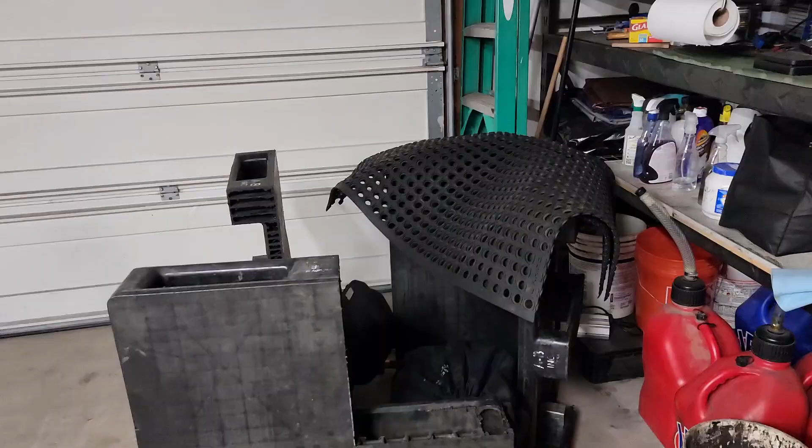I've got a project that I want to work on today. Let me show you what's going on. So you may notice here that all of the floor panels in the cargo area of Rusty are out. And I picked up some components from Wilwood, or however you want to say it.

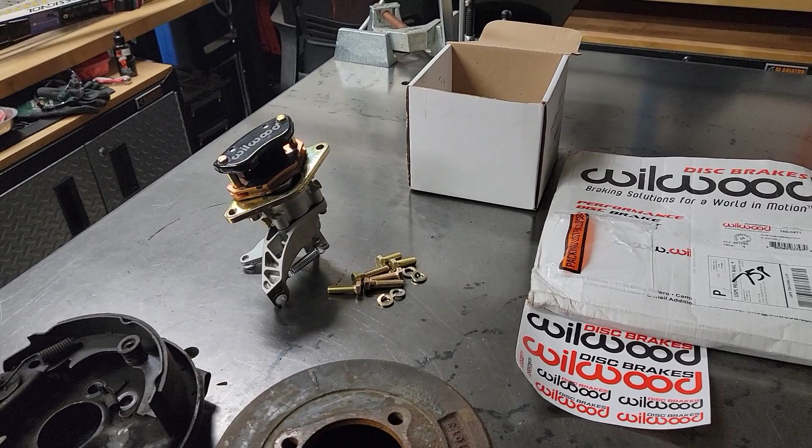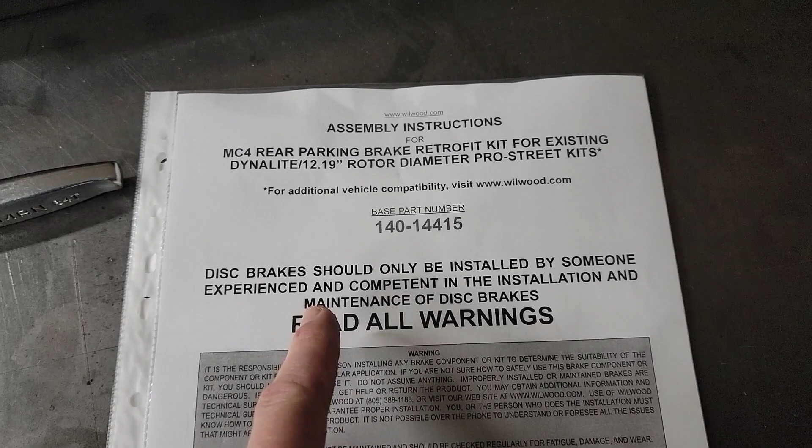First, I want to give you a disclaimer here that these should only be installed by someone experienced and competent. I'm neither one of those, so if that frightens you, this probably isn't the best video for you. Anyhow, let me show you what I came across here.

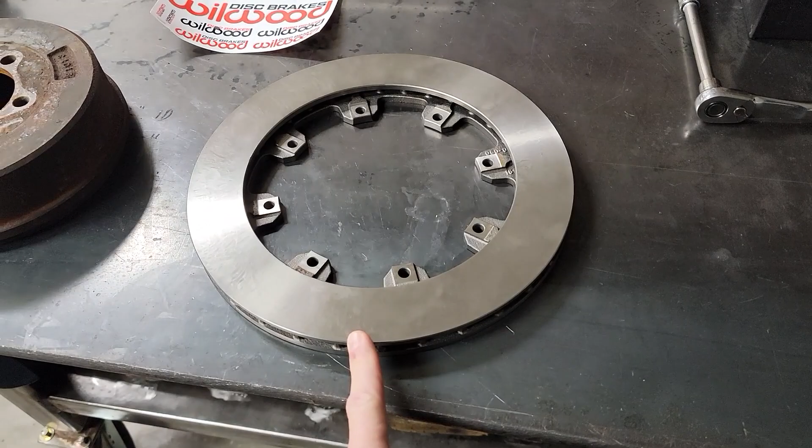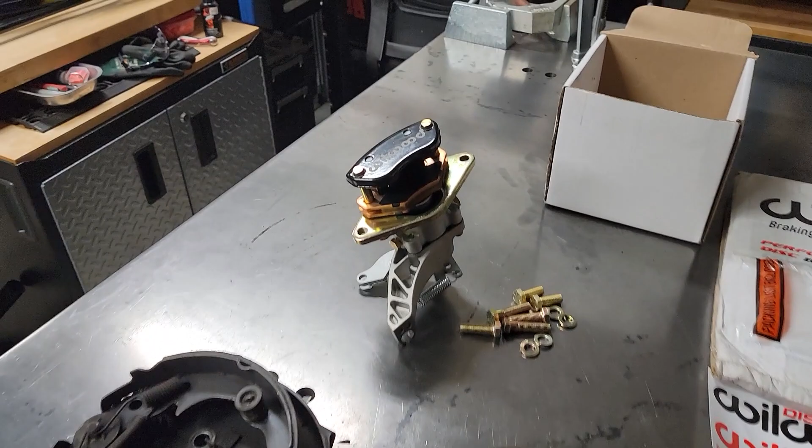I've got a rotor. This is a 12.19 inch rotor, and that's the diameter. And a parking brake caliper that's cable actuated. Now, if you remember in my build series, I have a cable actuated drum brake for a parking brake.

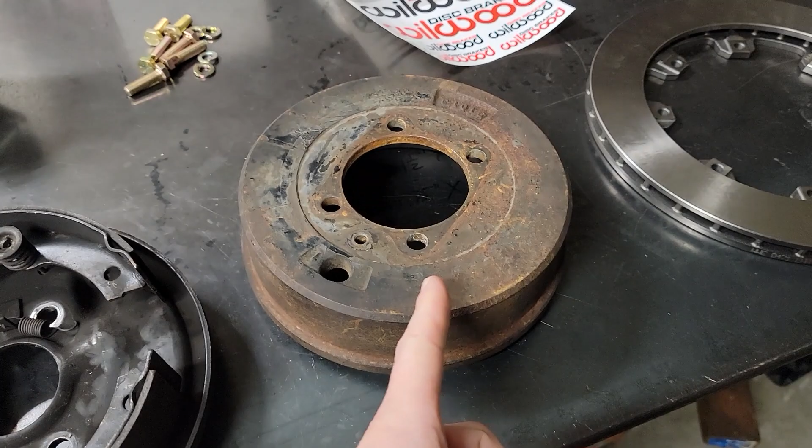I've actually gone through the original one. This is a spare one that I have, because remember I have a spare transmission and all the goodies that go with that. But I went through the one that's on the Snowcat right now and replaced the brake pads and all the springs and cleaned it up and everything. And it still doesn't work worth a crap.

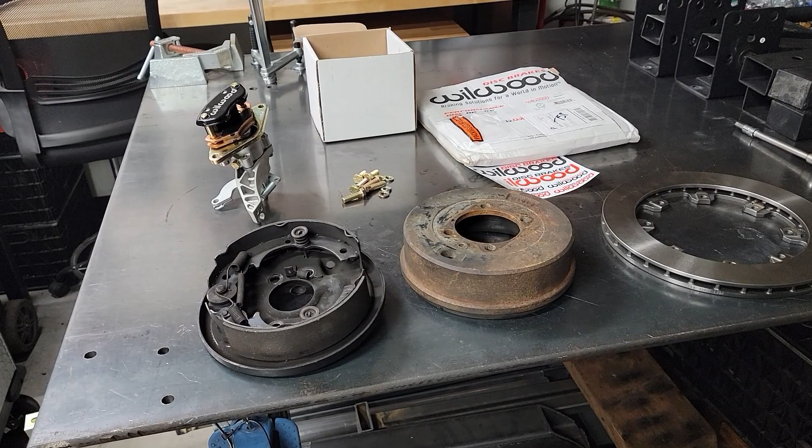So this is kind of going to be the beginning of a solution for me as far as braking goes with the Snowcat, because pulling back on both sticks and then trying to reach the shifter to put it into neutral is tending to be a bear of an issue for me. It feels like you need something to push with your foot to stop. That's what it feels like when you're driving a car and stuff.

And it's probably because I'm not used to driving a Snowcat all the time. However, it would be nice to have a foot brake. So bear with me here. So basically what I have to do today is figure out how to get this perfectly centered on the existing drum. And then of course I have to chop the drum part off and all that good stuff, but we'll get to that in a minute.

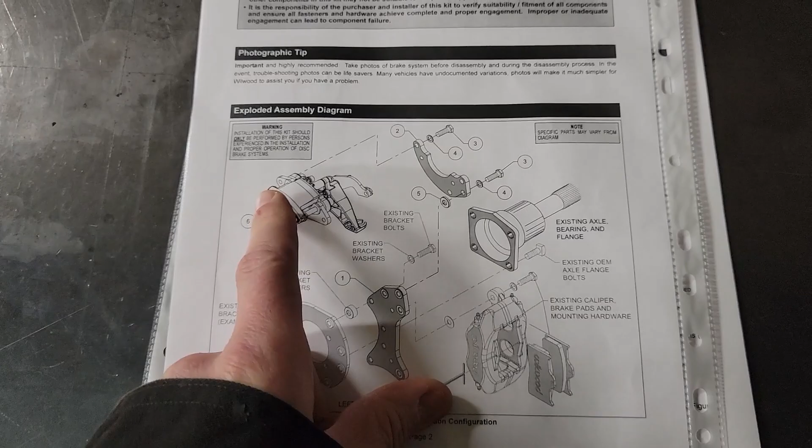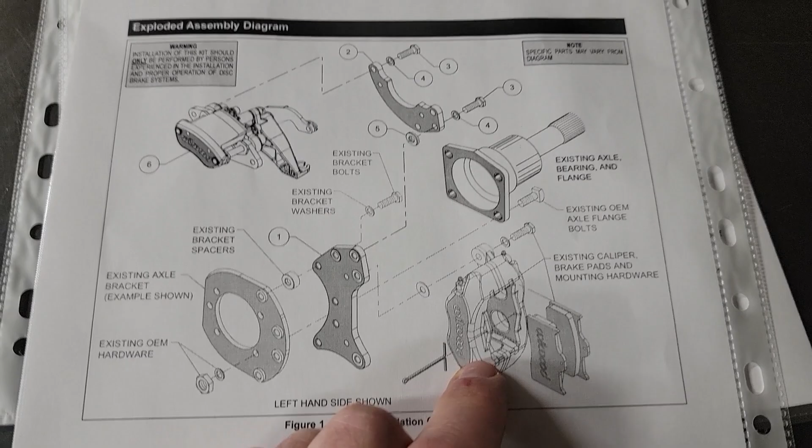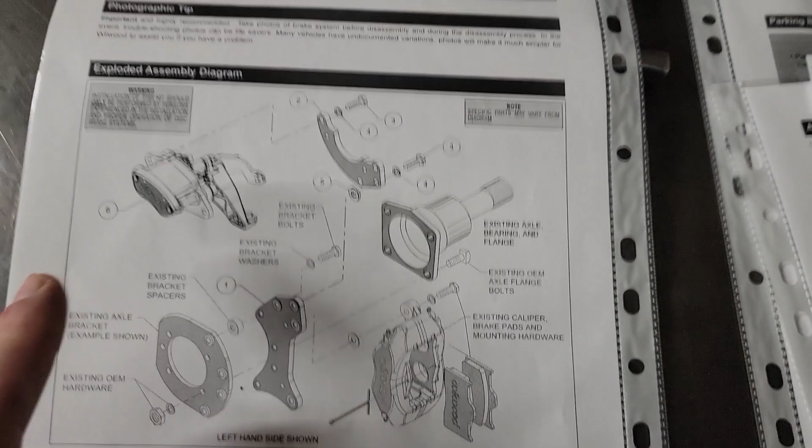What I ultimately want to do is, here's kind of a diagram that comes with the instructions. So you have a parking brake that sits at the top, and then 90 degrees from that, you have a regular caliper brake. So there's another picture in here. Here's how it kind of sits. You only see part of it, but my goal is to get this parking brake set up, and I could actually probably use it as a foot brake at that point. However, it's not going to have the stopping power that a larger 4-piston caliper would have.

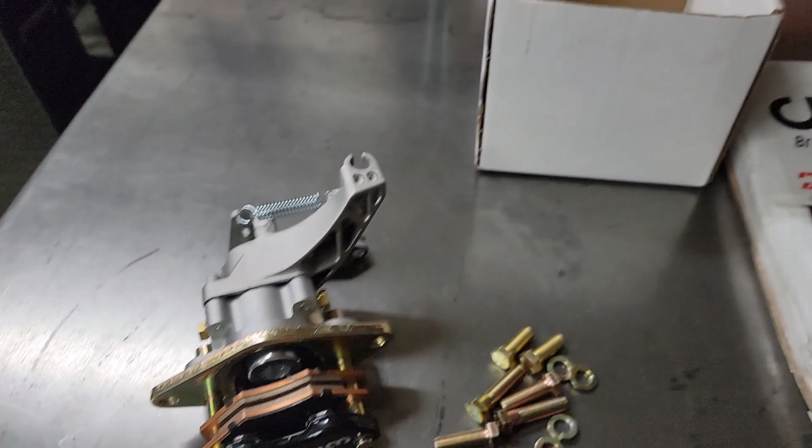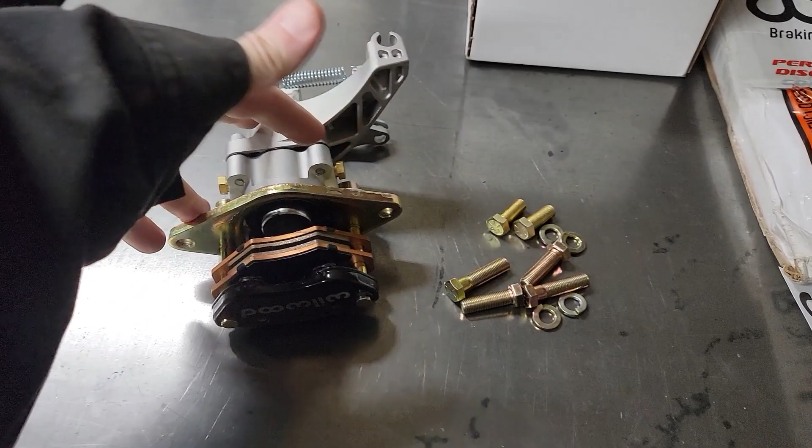So I want to get the parking brake set up today, which is going to require getting the disc mounted to the drum, modifying the drum, taking the original setup apart in the Snowcat, and then fabricating a bracket for the caliper. This basically has bolt points on here, 3/8-24 bolts, which I bought a handful of different sizes, and then those bolt to like a bracket or whatever. We'll come up with a solution for that. I have plenty of steel sitting around to make that happen.

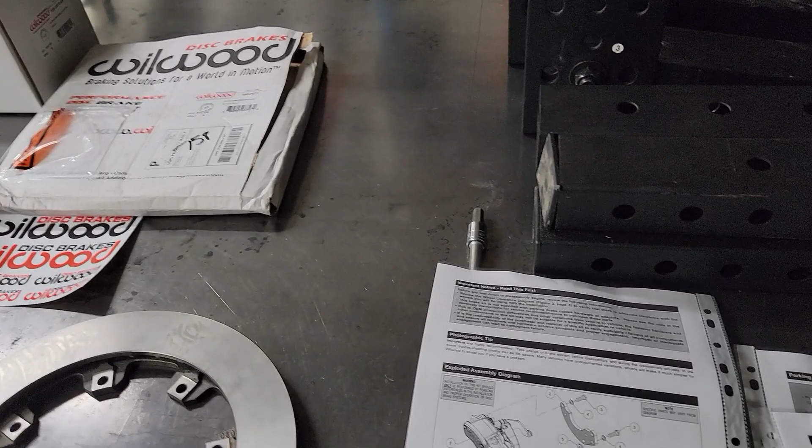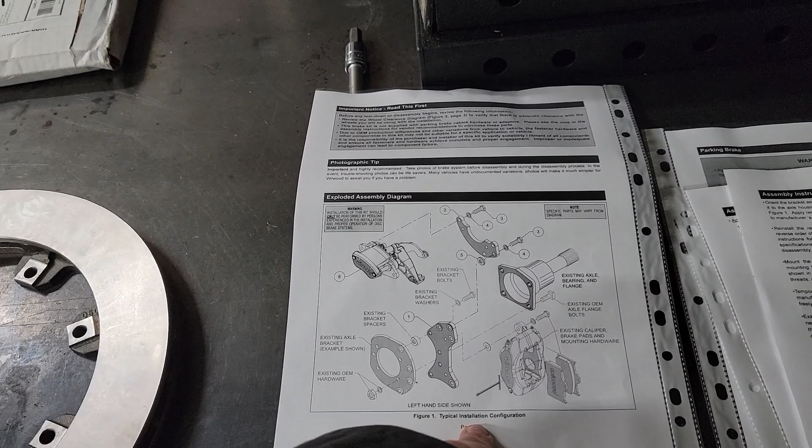And then once we get that dialed in, test it out up at the mountain, see how it works. We'll most likely be going to a hydraulic 4-piston caliper and an actual hydraulic foot brake. And I moved the sticks around one more time to a position where they normally sit in an old 1960s Spryte. So it's still dark outside. We'll get to that here in a little bit. But for right now, what I'm going to focus on doing is trying to get this disc mounted to the drum and getting the drum modified. So let's start working on that.

By the way, I forgot to mention, these were very inexpensive. I think this was 40 bucks shipped and this was about 120 bucks shipped.

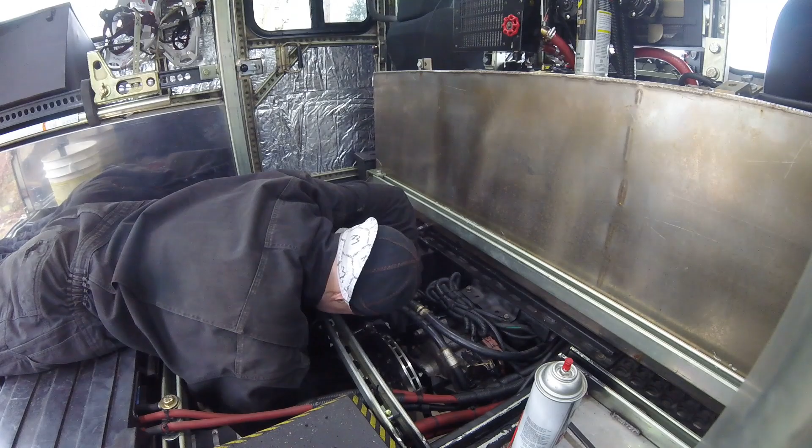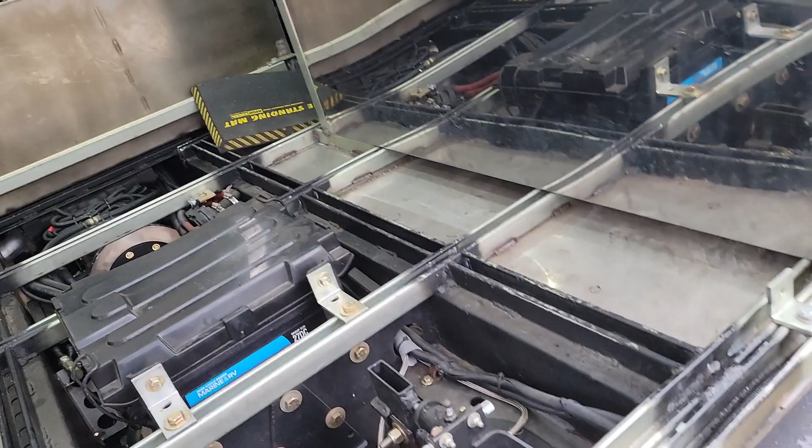Alright guys, this project took a lot longer than I thought it would. This is probably going to be part 1 of 2, but check it out. I did get it mounted and it looks awesome. Kind of hard to get a view in there, but

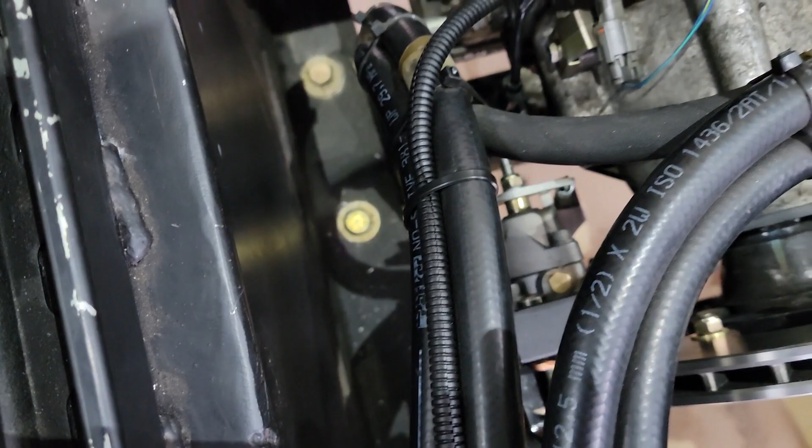so I still have to connect the drive shaft. I've got to tie wrap a couple cables up, but it fits in there perfect, and I made a super heavy duty bracket for it. I welded a bunch of gussets and supports onto it, so way more than you could ever imagine that you would need. I have to figure out a different cable routing so that I can get that cable under the transmission and then going into that brake. But I think this is going to work out a lot better than the drum brake that was on there.

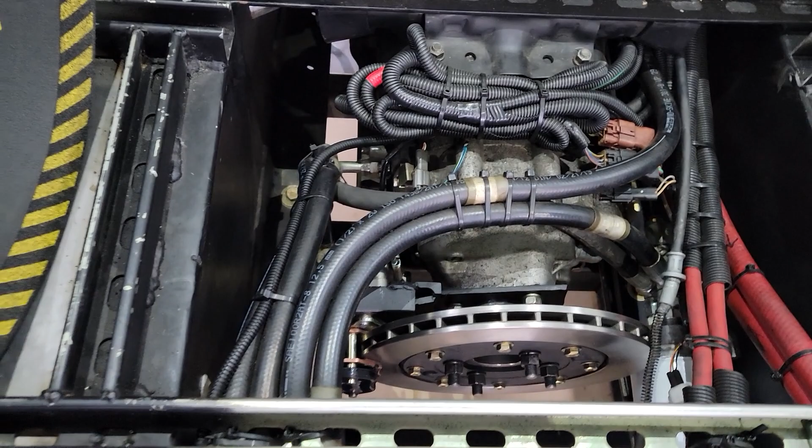And there's plenty of room for a hydraulic caliper, like right here if I want to add another one for a hydraulic actuated brake rather than just the parking brake cable. So yeah, this opens up a lot of possibilities. Wasn't too hard to do. It was pretty easy to get that centered using some washers as spacers.

But yeah, I think I'm going to call it quits for today and probably come back out here tomorrow and get the cable situation fixed and then get it connected and then adjusted so that it's working good, and then get the drive shaft put back in and reinstall the interior. Hopefully I can get all that done tomorrow.